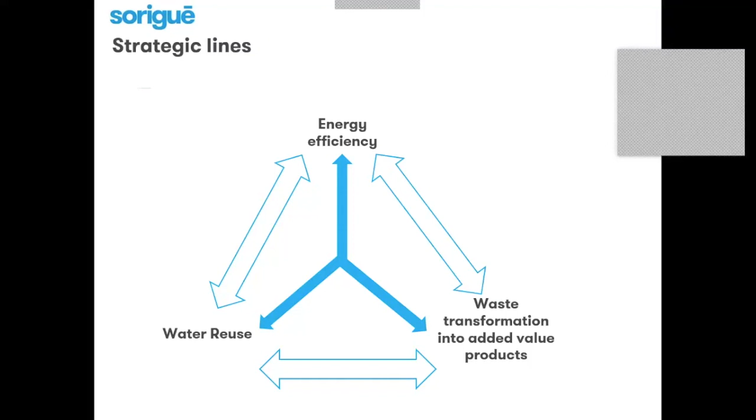Therefore, we are working in different cutting-edge technologies, in different water treatment R&D projects, mainly based on the use of nature-based solutions. For instance, my previous speaker, Clara, explained those, and we are working with them in projects called Electrowetland and Watertur. Also, a new disruptive desalination process, where we are working in the Low-E project. New materials for wastewater tertiary treatment, where we are working on the Water Harmony project and AQUA-GOX project, together with ICFO, this research institute.

Also, revalorization of wastes from wastewater treatment plants, and advanced microbiology treatments for removing pollution in wastewater to enhance reuse. We are going to start to collaborate with Eurecat in the project Water Mining, which starts in September of this year. And this is a European project, an H2020 project.

Beatriz. Okay. Yes. You have a pop-up in the middle of the screen. I suppose it's the list of participants. If you can move it to the corner, okay. Thank you, because it was covering some part. Thank you. Okay. Well,

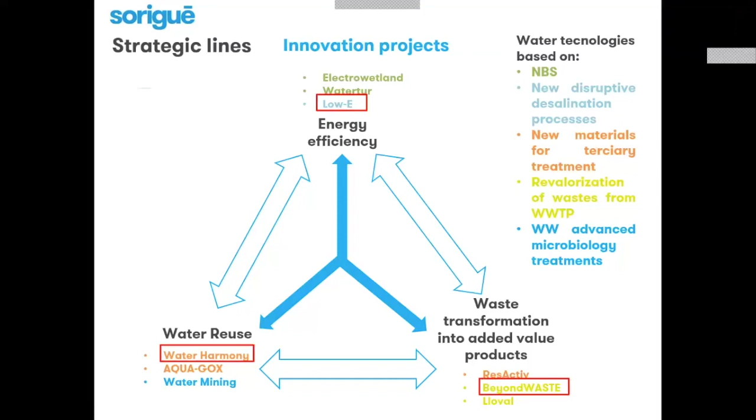all these projects, I want to point out that they are always focused on being more sustainable and more environmentally friendly. As I have a short time for my presentation, I want to focus on some of the different innovation projects that we have in our portfolio, just to transfer you the idea. Well, let's start with a project from the energy efficiency line. This project is called the Low-E Project, and it started at the beginning of this year.

This is a desalination project where the general objective is to cope with water scarcity through the development of a new energy efficient desalination system to treat waters of different salinities, recovering 100% of water and reaching the desired zero liquid discharge. Sorigué, in collaboration with Tecnalia, will co-develop a system based on capacitive deionization technology, which uses an electrode made of graphene to absorb the different salts.

On the other hand, the German partnership formed by TINNIT, an SME company from Germany, and the Technical University of Köln, will work on a desalination post-treatment technology consisting of a solar-powered thermal technology controlled by an intelligent self-learning process to reach this desired zero liquid discharge, to get 100% salt recovery and pure water for different applications, for instance, municipal, industrial, or agriculture.

Okay, first of all, we will test some trials at lab scale in order to transfer this knowledge to design and operate a pre-commercial pilot plant in real conditions. Well, the duration of this project is 2 years, and the call from which we will receive the funding is Nuclis Internacional, a program interlinked between Catalonia and Germany. And as well, for information, you can see here also the total funding that we received from our funding agency.

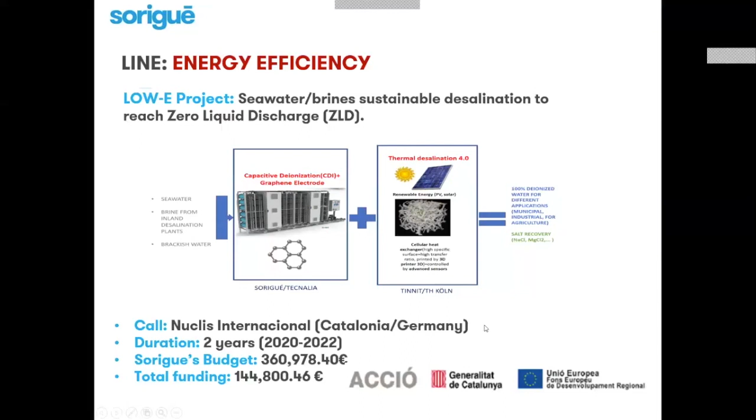Okay, well, the second one is the Water Harmony Project. This is an international project with 12 partners, where we are collaborating together with Leitat in order to develop innovative compact filters made of electrospun nanofibers able to remove micropollutants to enhance water reuse. These filters have significantly higher water permeability than conventional membrane processes as tertiary treatment. Therefore, they require relatively low applied pressures and relatively low energy.

These polymeric nanofibers are able to remove different micropollutants such as microplastics, antibiotics, pathogens, and pesticides, and the water produced will be used for agricultural purposes. First of all, we will design these filters at lab scale to test them and transfer the know-how to design and produce a real filter to test in a large scale wastewater treatment plant that we are managing.

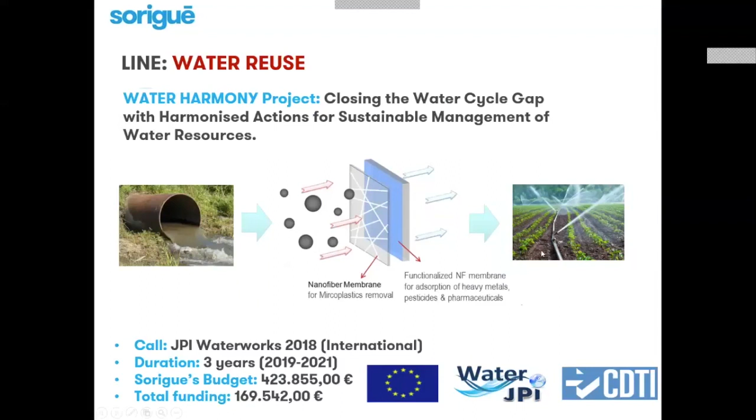Well, as you can see here, this project comes from an international call that is called Waterworks, and the duration of this project is 3 years. And well, it started last year in 2019, and we have already had success designing a PAN and PVDF nanofiber at lab scale. And now we are trying to do some tests at lab scale in order to translate all this knowledge to a pilot scale.

Okay. Well, the third and the last project is the project called Beyond Waste. This is a project from a circular economy Catalan government call that we are working on together as well with Tecnalia. And it consists of transforming different wastes from the screening unit and the sludge line from different wastewater treatment plants into nanocellulose, by means of physicochemical treatments, first of all, for instance, using an oxidation as a pretreatment, and after that, different stages of refining to obtain the final product, the desired nanofibers.

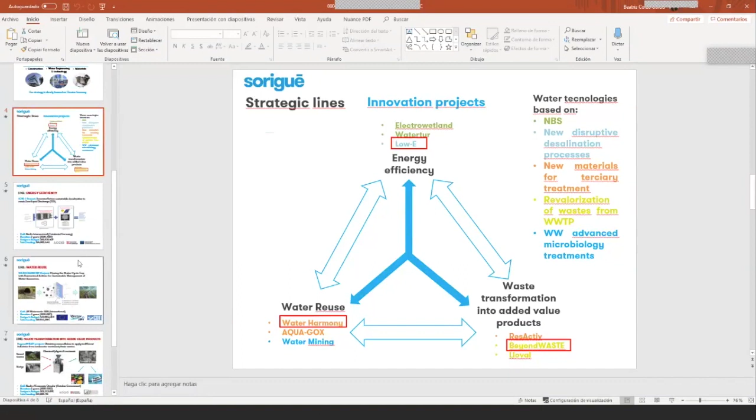Regarding the Water Harmony project, the question comes from Alicia. What will you do with the retentate? Is it possible to valorize the microplastics? On the other hand, how will you treat the concentrated emerging contaminants?

Good question. Wow. Okay, we have two focuses in this technology. The first one is mainly focused on removing pharmaceuticals and pesticides, this kind of pollutants, thanks to adsorption technology that we applied in these nanofibers. And the other strategy is to remove other pollutants like microplastics and to obtain a concentrate as well. The question was focused on the retentate.

Our strategy is to do some backwash from these nanofibers, and with this concentrate, try to characterize them and try, in other future projects, to know which is the best strategy to remove these microplastics or to oxidize them. But this is not in the scope of this project nowadays.

Okay. And the second question, please. Is it possible to valorize the microplastics? To valorize, as the word says. Microplastics are a low volume or a low concentration of plastics. Maybe a possible valorization is to go with this concentration to recycling. I'm not sure about that because I'm not an expert in this topic, but maybe one exit for these microplastics could be a kind of recycling of plastics, in order to close the circular economy cycle. But I'm not an expert, sorry.

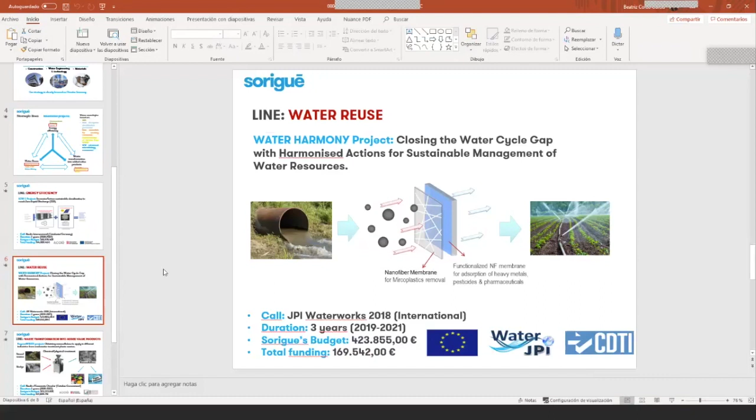Alfonso del Rey asks if nanocellulose is obtained from vegetal waste or from bacterial fermentation. From vegetal waste. Well, I can show you the slides. We would like to characterize the sieve wastes and the sludge line wastes that come from a wastewater treatment plant. In this kind of waste, we can find wet wipes or sanitary towels or diapers, for instance, and we want to characterize these wastes and see their cellulosic potential. And thanks to these chemical and physical treatments, we can obtain, first of all, cellulose, and after that, nanocellulose.